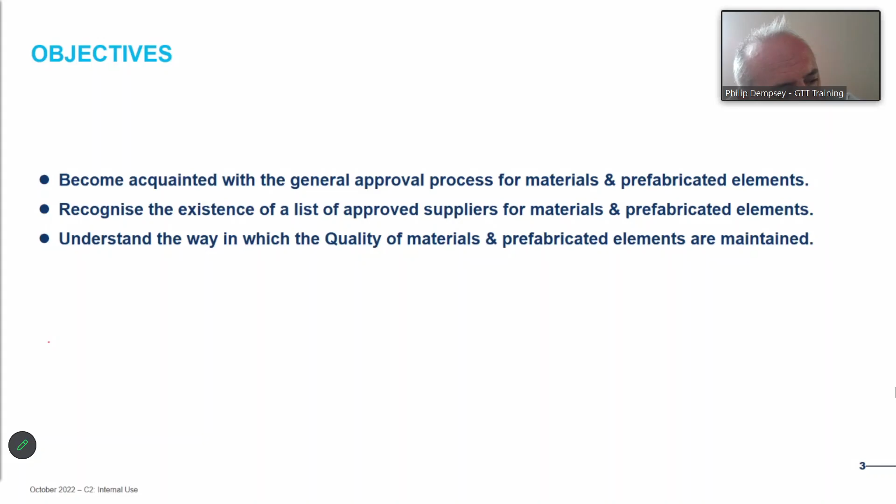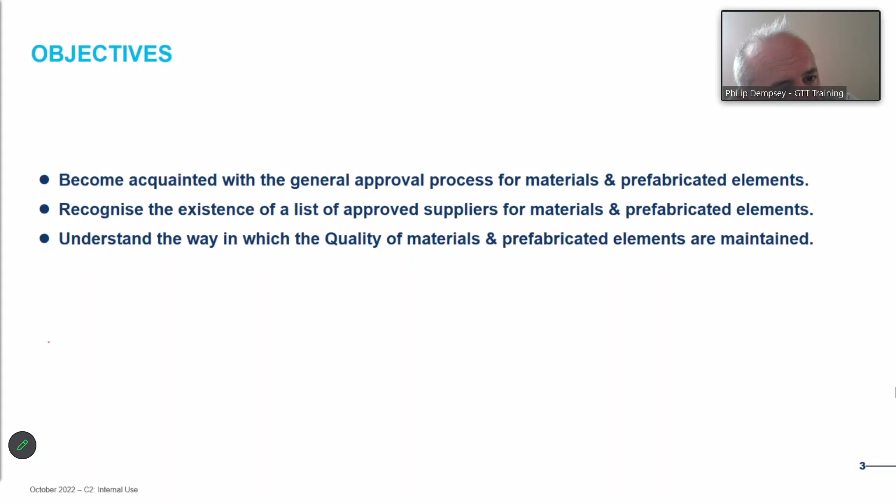But what is important is that there's a list of suppliers for GTT technologies. And it's important to realize that there was an awful lot of work to get this list. If you have 15 technical specifications, all of which define a different type of material with specific characteristics which need to be acquired in relation to the technology to which it's going to be applied, and you give that to someone and say, go find materials which conform with that specification, make sure it's all conform, and then you can think about using it. The headache, the panic, it's an incredible feat.

You've got to realize how many companies there are, how many different products there are out there. There are thousands and thousands. So what GTT have got is a list of companies who've already demonstrated the industrial capacity and capability to produce the materials and prefabricated elements as required for building the containment system in a correct manner. So it just shows that when we say to a builder, you must use a company which is listed on the suppliers list, it's said for a reason.

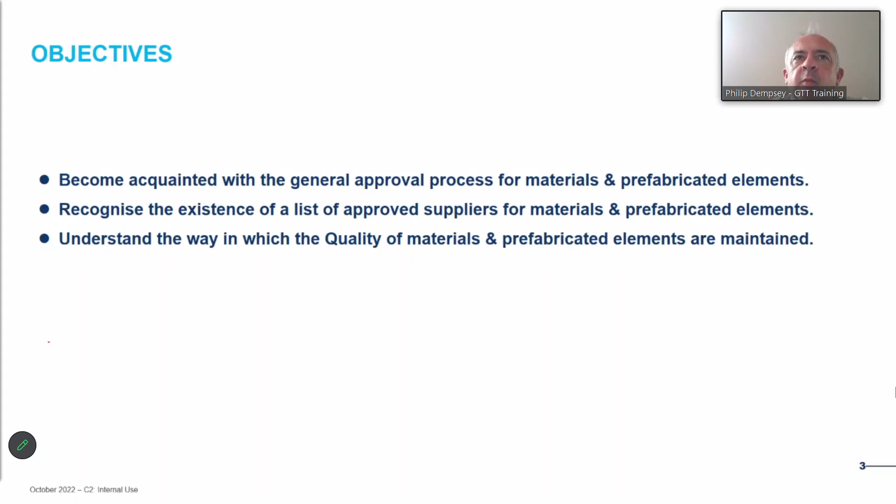Understand the way in which quality materials and prefabricated elements are maintained. Okay, so we'll look at that a little bit in the way in which it's done. So the functional organization chart and specifications. Well, on the left-hand side, you've basically got what happens. GTT define the technology. From that technology, they define the specifications for the materials and the prefabricated elements in relation to the technology.

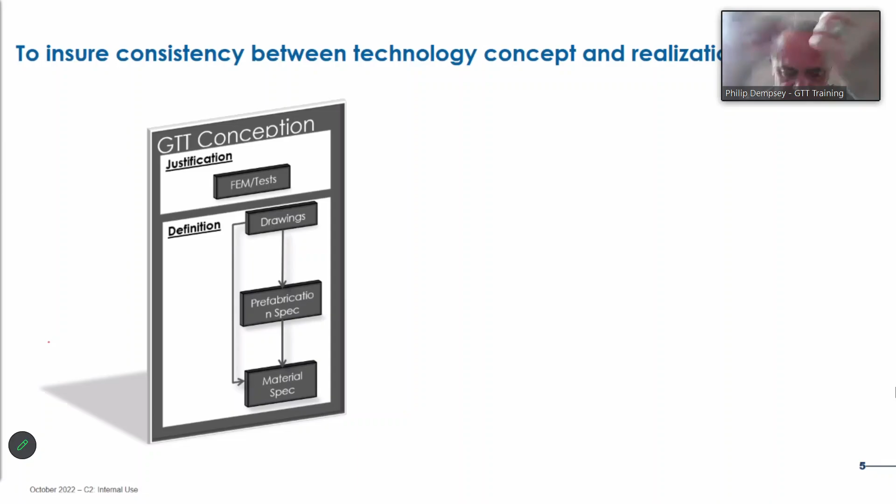So, for example, if you have a basic definition of a containment system, you have a primary membrane, a primary insulation space, a secondary membrane, a secondary insulation space. What the guys are going to say is, okay, I want a material which is both insulating and load bearing, so it can sustain the loads imposed by the cargo upon the containment system, and transfer that nicely to the inner hull. So both insulating and load bearing.

So immediately you're going to say, well, keeping it simplistic, I need to check for resistance to compression, but also I need to check the thermal conductivity of the material. Then you're going to say, where is it located? Right underneath the primary barrier and very close to the inner hull. So you're going to say, I want to test its load bearing capacity and its insulating behavior, one at about ambient near the inner hull, and one at minus 161, where it's just beneath the primary membrane.

In working in this way, very quickly, notice you're calling upon the technology. You're looking at the technology. What is the functionality of the material? Where is it located? That is going to define for you characteristics that you need to check. Then also you're going to be looking at the interfaces between adjacent materials. So a plywood bonded to a foam.

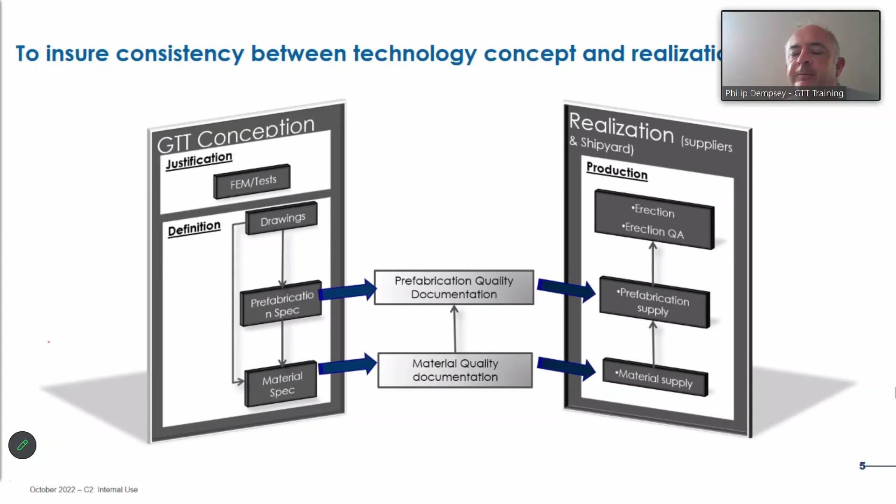It is very important that we provide the indicative tools necessary to the builders to ensure that they have the right materials, the right quality and the right performance we're looking for, and that by putting it together correctly on board, we can ensure the end performance of the containment system. So on board, that's where you have the GTT recommendations, or the erection handbook, the bonding handbook, and the welding handbook. And all of this is overviewed by the class.

The class is basically certifying the vessel. The containment system, which is part of the vessel as such, is reviewed by the class and approved by the class. The materials and prefabricated elements which are used to build the containment system are also overviewed by the class. They have their approvals of the materials and prefabricated elements produced by the chosen suppliers.

Now, what is important to say here is, please note: GTT, suppliers, shipyard, class. You can also add owner here. Everyone is playing a role. Everyone is playing an important role to ensure that the end product, when it's delivered, will perform as it should.

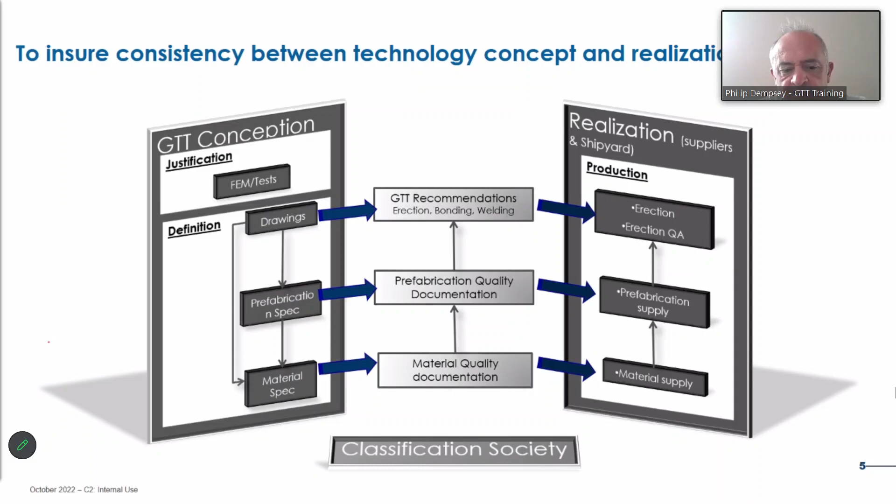NO96, you have your boxes. Your boxes are basically plywood which has been cut to the required dimensions to build the box. The box is basically stapled together, held together with the staples, and then the box is filled with either perlite or glass wool. As simple as that. But that's a prefabricated element.

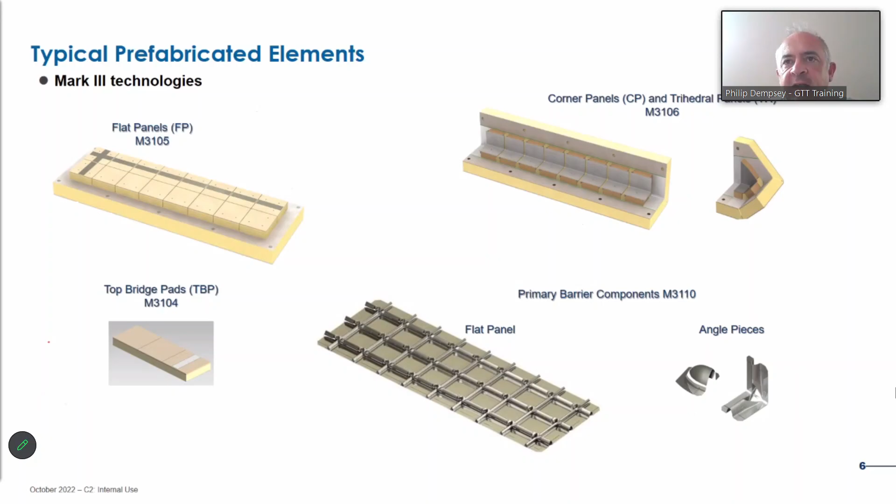So each component type has a dedicated specification, with specific performance characteristics and testing methods. Now, in terms of testing methods, in general, for materials, not so much so with the prefabricated elements, because you'll be dealing more so with the modular elements which have been already either transformed or brought together utilizing base materials. You have two basic sets. You have your inherent properties, which you'll be testing, and you'll have your technological properties, which you'll be testing.

For example, an adhesive shearing test, tensile test or lap shear, whereby you're testing the product itself. It's a known material, and adhesive is known. Therefore, you have international standards. So when you do the inherent testing, it's following international or national standards. It's known.

Whereby you're doing technological tests, these are methods which have been developed by GTT, reviewed and discussed with the class, and only applied once the class and GTT are in agreement that the test method proposed is adapted and is well capable of testing and making sure that the material to be used is performing as it should do for integration into the containment system. Then level 1 or level 2 classification is assigned. This is very simplistic, actually. I keep it simple here.

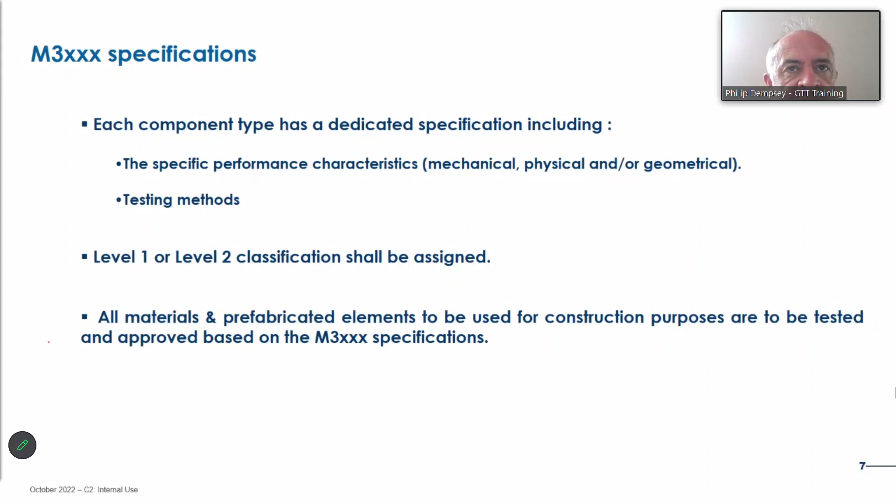If you consider the Mark III, and you have a mastic, the functionality of the mastic is to bond and maintain the insulation to the inner hull, but also it's there to transfer the loads that we impose upon the system to the inner hull. So if anything was to happen to the mastic, that's going to have an impact upon the overall performance of the system in one way or another. So that's a level one. And level one materials and all prefabricated elements are tested under GTT supervision for approval.

Level two, if we consider NO96, in NO96 you have a kraft paper. The load-bearing mastic used underneath the boxes is there to bear the loads imposed upon the system, whereas the kraft paper is to stop that mastic from bonding to the inner hull. Why? Because you want to have that flexibility of the box in relation to the inner hull when it deforms. So if the kraft paper ripped, it has absolutely no impact upon the overall performance of the system. So it's a level two.

In fact, if you go through all the materials and look at them carefully, you can define the classification for each of them. So whereby it's a level two classification, this material or prefabricated element can be produced and tested by the maker. However, to remain aligned with the general approach of the class, what GTT say to the manufacturers today is get it tested by an independent third-party accredited laboratory. In doing so, the class and GTT can quite happily accept the data. Otherwise, GTT reserve the right to attend the production for approval, and they can also decide to perform the tests on the material themselves. Level one is testing done by GTT or under GTT supervision.

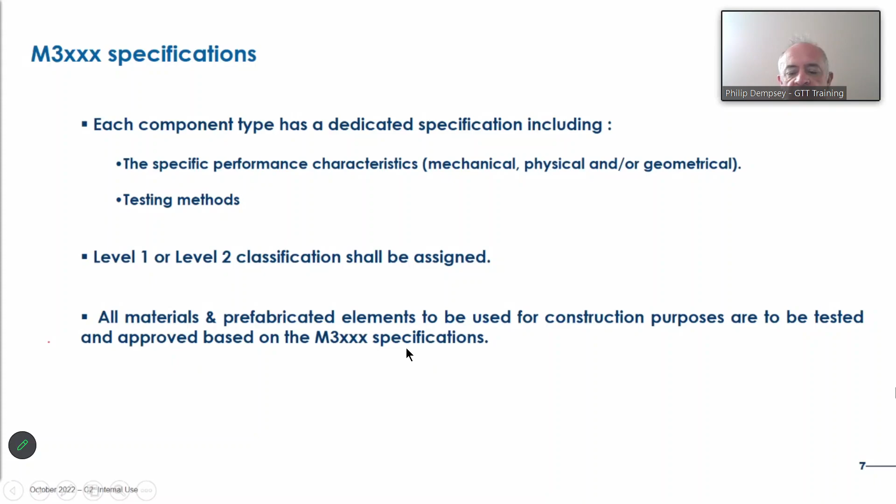So, two specifications. This is for the shipbuilding. M3000 is for materials and M3100 is for the prefabricated elements. Once again, these are both being written. They give a comprehensive description of the way in which the approval is performed, but also in what way we follow up with the makers after approval when they're in mass production. So 3 steps: supplier company assessment, component approval, and supplier mass production follow-up.

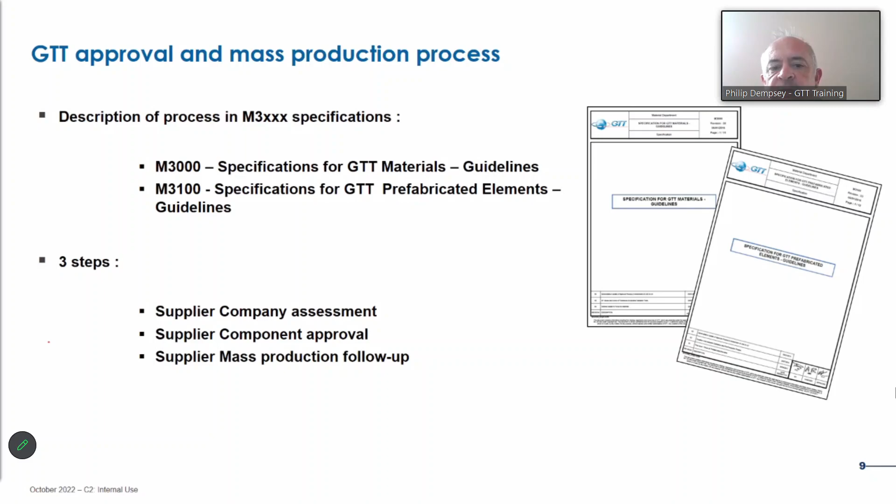First thing is the company assessment. Now, this has got nothing to do with the component that they will produce, okay? It's purely working and looking at the manufacturer. So how do things start off? Well, basically, the first thing is that GTT will be contacted. I'm not going to give you all the different options available. We're going to stay on a simple scenario.

We have a manufacturer and he's interested because he's seen there's lots of volume in the domain and he wants to get involved. We'll leave it at that scenario. So the first thing he's going to do is say, well, look, I'm contacting GTT. I'm very interested in becoming a manufacturer, supplier of this particular product. What do I have to do? Well, the first thing we will do is sign a bilateral non-disclosure agreement.

We remind ourselves that GTT are going to be providing to them the specifications, which are part of the technology. But that manufacturer also will be opening up their doors to let GTT people go in and basically audit and see everything. So it's very important that both companies protect themselves.

Well, after signing, GTT will then provide them with the materials and/or prefabrication specifications. Obviously, the company is going to need those to study. And also a supplier feasibility commitment document. The idea at this stage here is to provide the manufacturer with enough information for them to self-evaluate the cost related to them being ready to become a manufacturer.

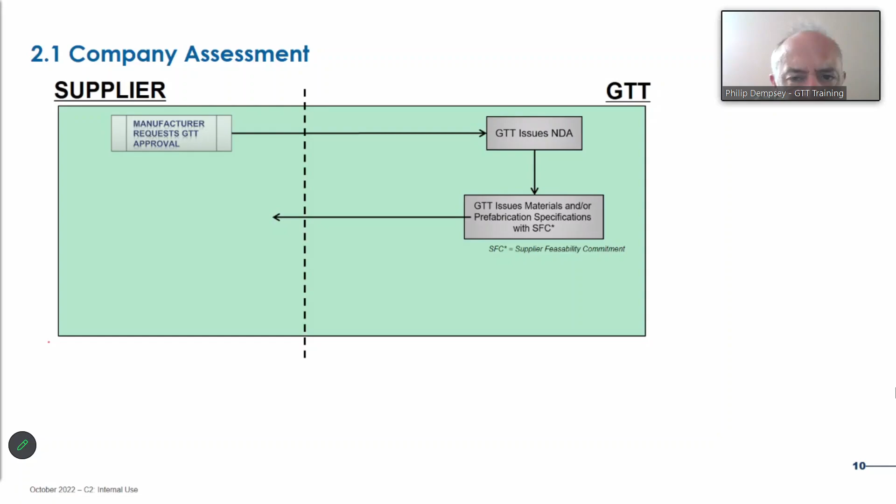Because it's important to them to say, okay, if I'm spending 3 to 5 million, when will I get a contract? When will I get my money back through those contracts? Those are questions which the top management of these companies are going to be asking themselves. And that's why they will perform an FID. And after they've made their FID, they will decide whether they want to go forward or not.

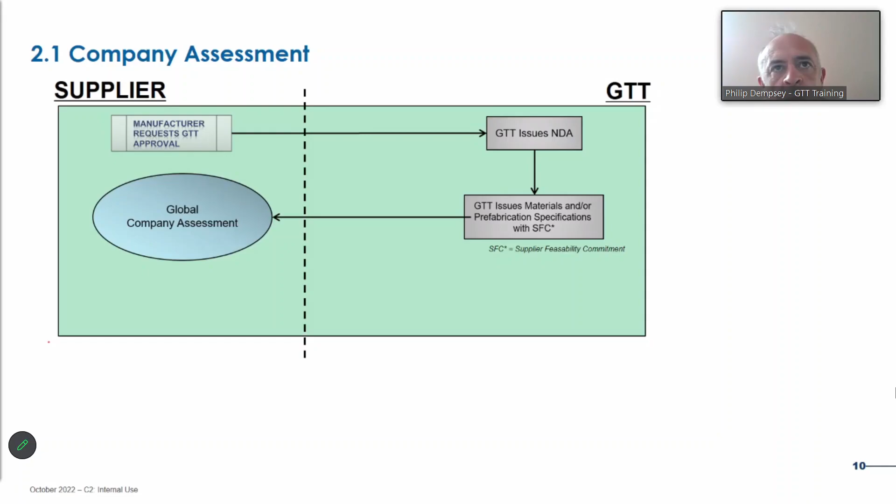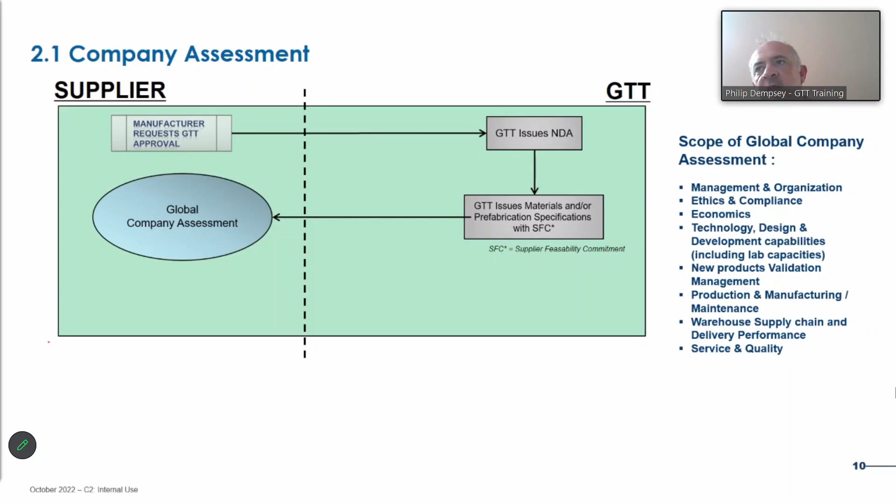If they want to go forward, then we do the global company assessment, which involves very much these items here. What is important here is that the GTT auditor evaluates how the company works. What are the common working practices in place? What are the common standards which they're using? Are they abiding by those standards? Really seeing how the company works.

Because if you go to see a car manufacturer who builds specific parts for the automobile business, or you go to someone who's already in the aerospace industry, you will see very quickly the way in which they work and how they abide by the requirements already in place with regards to the standards being used. And from that, you'll know very quickly how they will work for you. So it's really getting a global overview of the company.

And then there will be a report which will be issued at the end. And in that report, there will be an indication as to a rating of A, B, C, or D. A, B, and C, you'll have a certain degree of comments, which will help to identify the delta between what they do and what we want. And they will be given something like 3 weeks to provide feedback into what they've done or what they are going to do, with a given schedule, in order to meet those comments.

If it's a D, it's a thank you, but no thank you. You're nowhere near what we're looking for. We do not wish to be working with you in the future. It's very good. That way we can be sure that the companies which are listed on the suppliers list have what it takes industrially to produce the materials and prefabricated elements for the builders.

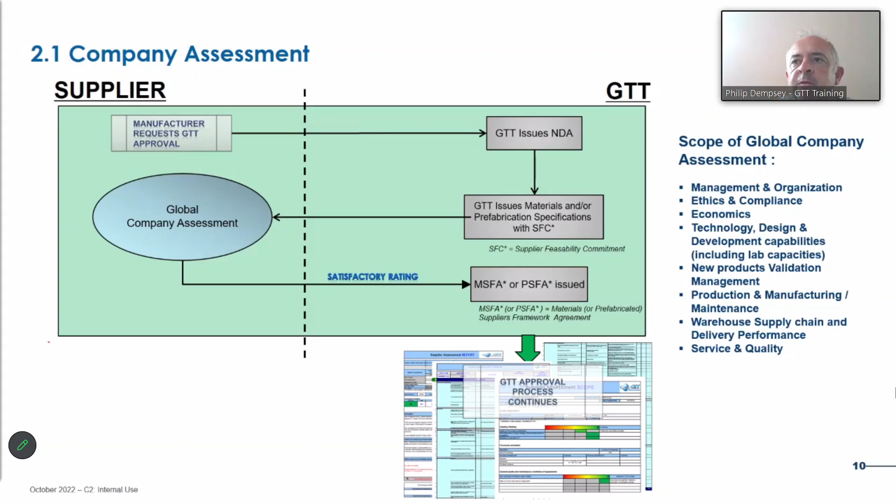Then we look at the actual component approval. Now, in the past, I had the materials and the prefabrication approvals separate. And we decided, okay, we'll mix them and just have a general approach, which would be largely sufficient for this type of course. So first of all, the company's already got the specifications in their possession. These guys are going to be performing the in-house testing, developing, and once they think they've got something which meets the mark, they will contact GTT.

And they will provide GTT with their test results and also the fabrication manual and the quality manual. Inside GTT, you've got two basic types of teams. You've got the technical guys, and then you've got the certified auditors. The certified auditors will concentrate on the documentation, the manuals, and the technical guys will be looking more so at the test reports.

If everybody's happy and everyone has confidence that the product which is being proposed will meet the criterion, then a work order is signed and a component approval schedule is agreed upon. The work order will define how much the approval will cost and what services GTT will provide during that approval. And then once the component approval schedule is defined, that will be shared with the classification societies. It's important the class are involved at this stage.

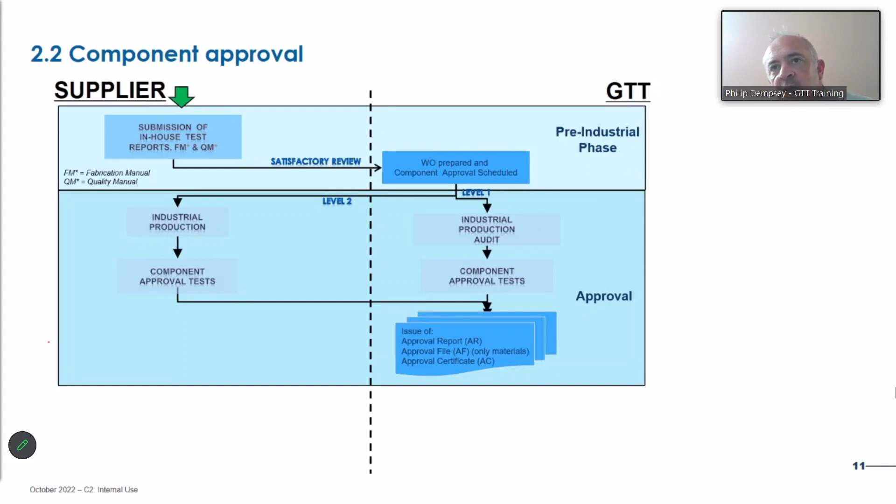It will provide production process parameters with a range in which they must remain. And also it will give the type of quality control tests to be performed in mass production with a range, to ensure that through time, the material produced under mass production conditions remains the same as when it was first approved. So that's just for materials, okay? So you have your origin, in fact. Your approval file is the origin for quality control for the builder, who's using that to check against all the materials that he's receiving. For the prefabrication, we'll get to that a bit later on.

And then, of course, you've got the approval certificate. So you've got these 3 documents: approval report, approval file, and approval certificate. And once they've got the approval, that company is then added to the suppliers list, and the name of the company and the product for which they have approval is given in that document. And it's that suppliers list which the builders then use and refer to when identifying which suppliers they wish to have for their project.

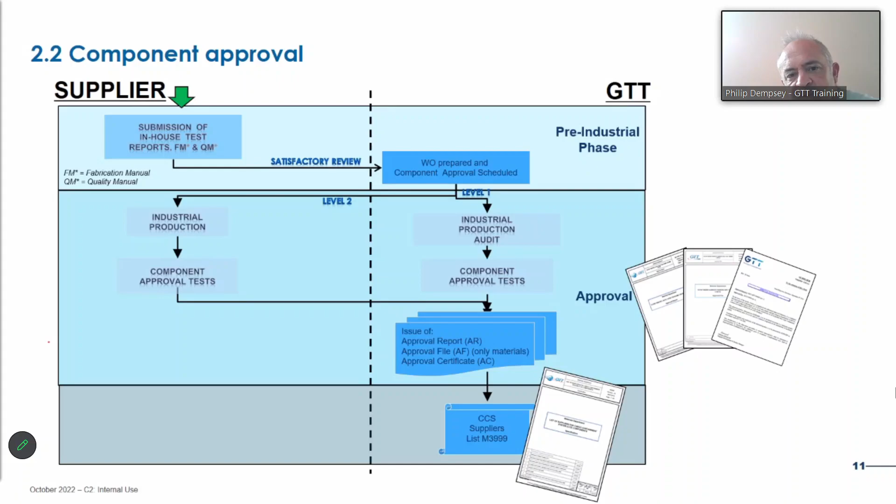So here, approval certificate, approval file. So once again, the approval certificate for me is more the commercial document, and the approval file is a quality control tool.

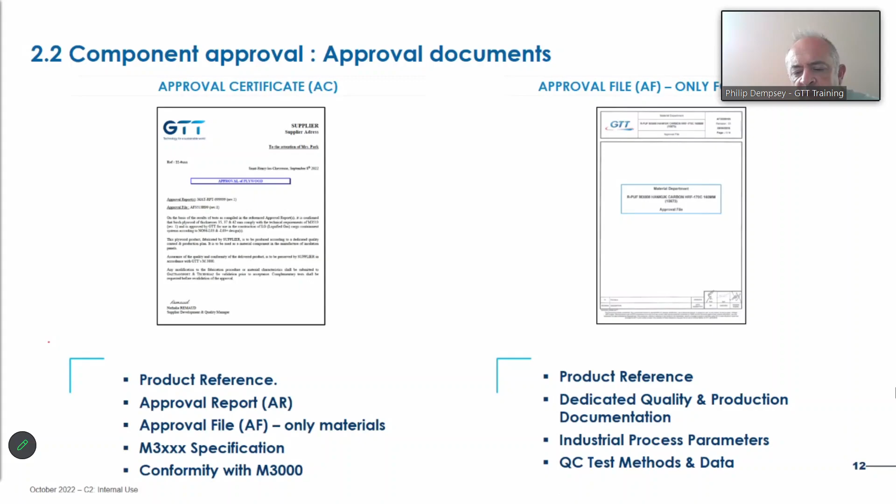A suppliers list, well, what I like about this one is that the suppliers list, it's basically GTT which guarantees, okay? They don't like to say it, but that's reality. I mean, I worked on this for so many years. This list which we give to the builder, we're basically saying everybody on this list has already shown industrially the capability and capacity to produce what you need to build the systems correctly. Full stop. That's it. GTT, in essence, they're guaranteeing the companies in that list.

And of course, as I said before, if they got a D rating, sorry, but no, we don't want you. We're already filtering out the weak elements. We don't want them there. We only want the good companies present to supply our customers. So the list, it provides potential suppliers for price estimation and construction. Why potential? Because you haven't chosen them yet. Simple as that. That's a bit of English there.

List of choice of suppliers for each material and prefabricated element. It is always important to maintain a good, healthy environment. So a minimum, a strict minimum of 2 companies per material type. It gives good competition in terms of quality, but also in terms of cost. It's regularly updated, or at least it should be, at least once every 3 months, 4 months. Well, once again, all companies listed here will have demonstrated the industrial capacity and capability of producing those components in accordance with the relevant specifications.

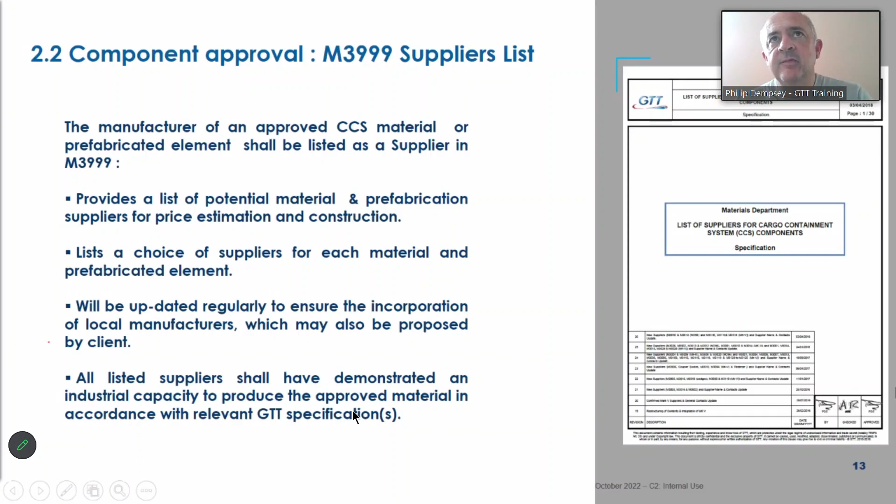So mass production, so the builder's got the suppliers list, he makes his choice. Materials, prefabricated elements. Now here we come to a little bit of difference. For specific prefabrication elements, such as the membrane, such as the Mark III insulation panel, box production, these are elements which are constituted, or can be constituted, of different base materials. Okay, what do I mean by that? When a company gets the generic approval from GTT for the production of an insulation panel, it's done utilizing a specific combination of, for example, plywood, foam, adhesive, keeping it simple.

For an actual project, because you've got more than one type of material for each type, you could have, for example, 3 plywoods, 3 adhesives, 3 foams. So the combination 3 times 3 times 3. It's highly improbable, it's going to be too costly and take too long to test every single combination possible. It's just not possible at the generic stage. So a generic approval is done utilizing a validated plywood, a validated adhesive, and a validated foam. And that gives you the generic approval. Okay, now it shouldn't matter if you change plywood A for plywood B. All the plywoods have been approved based on the specifications. So they're all going to perform correctly.

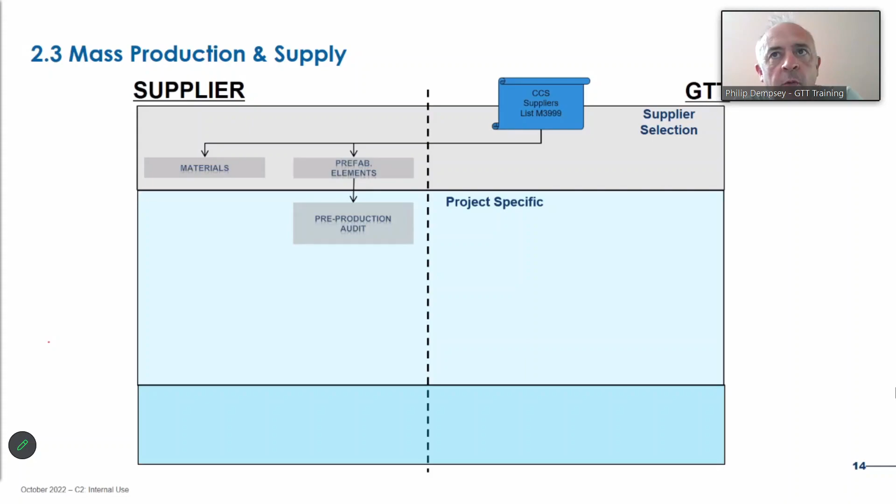So when it comes to a project, what they do is they have a first industrial production of a certain number and type of panels, using the materials which have been specifically chosen by the owner and the builder for that project. And then the pre-production audit is performed. And during that pre-production, you've got the maker, GTT, the class, the shipyard, and the owner. Everyone's present. They're actually observing and witnessing the actual production of panels for the specific project. Okay. Now, from that pre-production audit, you've got a memorandum of meeting to which is attached all of the quality control tests, visual or mechanical, during that pre-production audit.

Once everyone is satisfied and signed off on that memorandum of meeting, then and only then do GTT issue an approval letter specific to that project. Basically, an approval of the configuration specific to that project with the specific materials for that project. And that approval letter is only valid for the duration of that project. Now, keep that in mind, what I said there. Inside that memorandum of meeting, which is referenced on the approval letter, we have the quality control data during that pre-production audit. The materials, it doesn't change, okay? Your material, it doesn't change.

It doesn't matter if you're building a Mark III in Japan, in Russia, in Korea, in China, it's the same. Fundamentally, the materials are not changing. The specification hasn't changed. So you can use the approval file. For the prefabricated elements which have undergone a pre-production audit, that gives you the origin for use as a comparison during mass production. And then you do your auditing during mass production of both levels of component suppliers of level 1 and 2. And again, from which you're issuing out the reports.

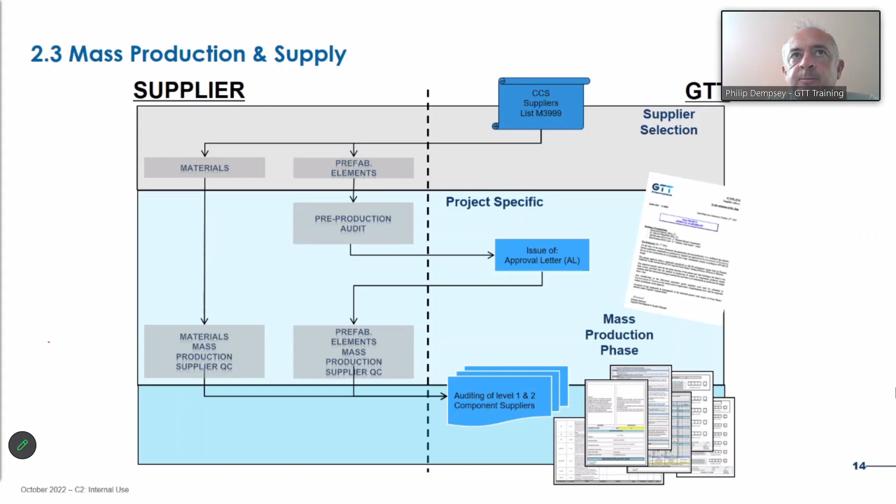So project-specific prefabricated elements approval. So here we've got a supplier issued with an approval letter dedicated to the specific shipbuilding project. So once again here, pre-production, October 7th, 2022. Production tests. Okay, so once again, it's these tests which will be referred to here for this specific membrane on the project, which hasn't been given. Oh well. That'll be used as a quality control tool for the membrane, whereas for the stainless steel sheets used for the membrane, that will have an approval file.

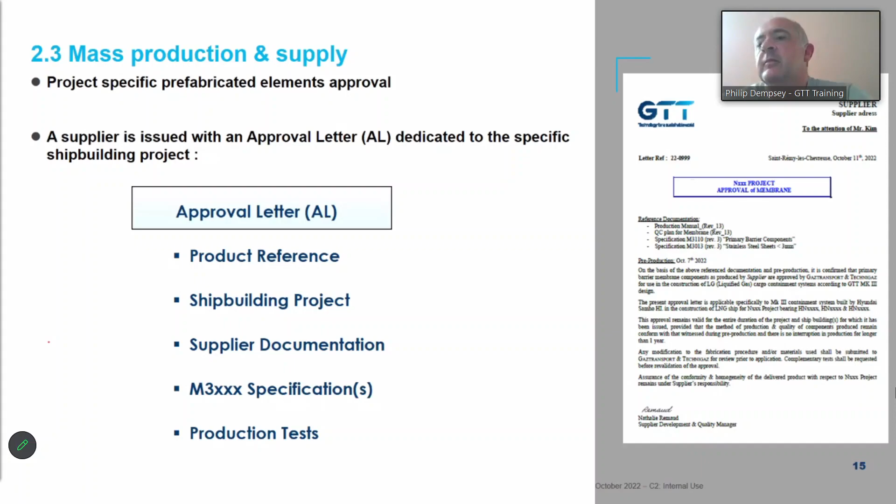Okay, so moving on. So we're on the last slide, in fact. So mass production and supply product quality. So the supplier, obviously they have to ensure and guarantee the continuous fidelity and repeatability of the production of the component for which they have GTT approval. The clients, the customer, they have to audit their chosen suppliers, okay? And they have to make sure the conformity of the product which has been delivered is the same as that which they have ordered.

GTT, the auditors, they do an auditing which is across the board. They audit the manufacturers a minimum of once a year. They do not replace the builders. Okay, the builders, they have their own QM. Okay, they have their own QC teams. They need to be auditing their chosen suppliers.

Now, we did identify in the past, when I first joined GTT, quite quickly it was made quite evident, even after discussing with some of the guys from the shipyards, that they didn't have enough personnel. You consider how big the yard is, how many ships they're building, how many tanks are being built in parallel, how many different manufacturers are being called upon. They just didn't have enough personnel. So what we did is we improved the process in which the quality was followed up on. And it's from there actually that the approval file was born, but also the approval letter, to assist the builder in being in a better position to follow through and make sure that the products he's receiving are in conformity with that which was purchased.

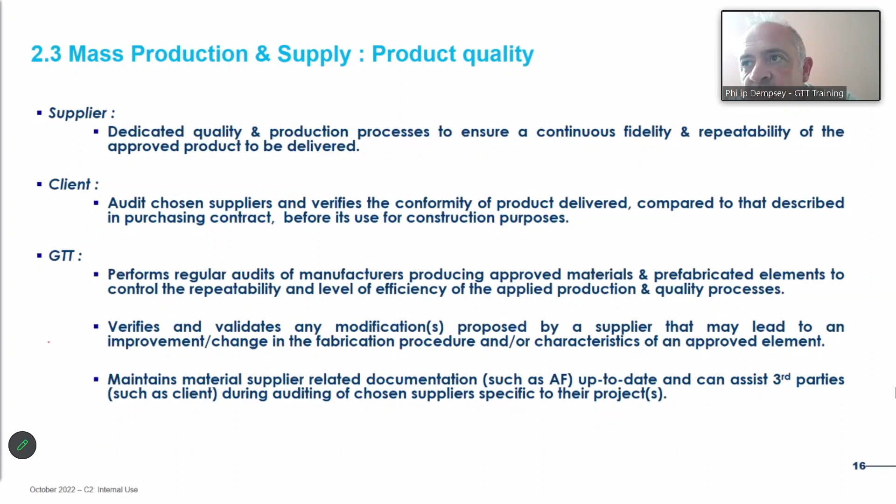Okay, so everyone's aware, and the builder will inform the owner so that the day that they're on site and the product changes from yellow to orange, it's okay. Everybody was aware of it. Everybody knows why it's changing color and that there's no problem. So they can just continue with installation and construction of the containment system. And that's it.

That brings me to the end of that rather short presentation, rather succinct. But I think all that is really required at this stage is for you guys to realize that these components were required to be approved based on specifications which have been created directly from the technologies. And it's only by using products which have been approved based on those specifications that you can ensure partly the end performance of the containment system once you've put it together correctly and it's in service. There we go. Any questions? Was that clear for everybody?

Wait, Philip. So yes, I have, let's say, a practical issue. For example, we start a new construction project, a new LNG order. I'm working as owner representative, and I'm planning to do some audit of a subcontractor for the shipyard. For example, they produce these angle corners. Corner elements, yes. So once I visit this factory, they should show me this approval letter which they got from GTT, correct?